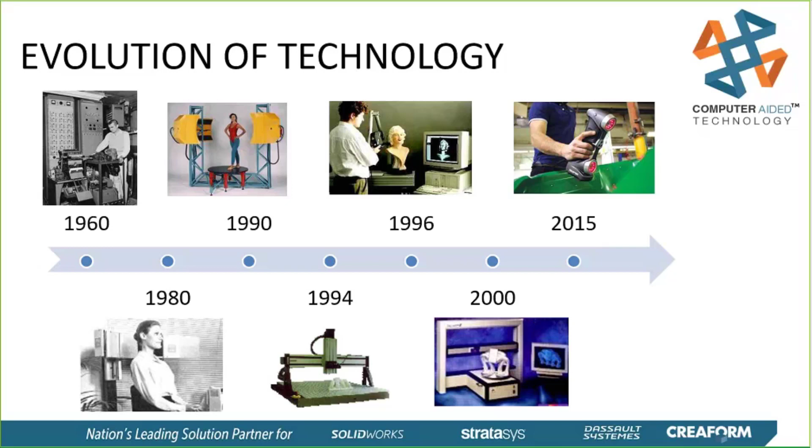There are many different types of 3D scanners that exist on the market today, and the best way to classify them would be to say contact or non-contact scanners. Although when it comes to non-contact scanners, we can break it down further into two separate categories: passive and active. For contact 3D scanners, you may have seen some on the market currently in the form of a CMM.

Basically they explore the physical object via a probing tip and must be in contact with an object surface in order to collect a 3D point. In order to use this device for inspection, multiple points are needed to create a single measurement. These are considered to be very accurate systems, but the workflow is a little bit more in depth.

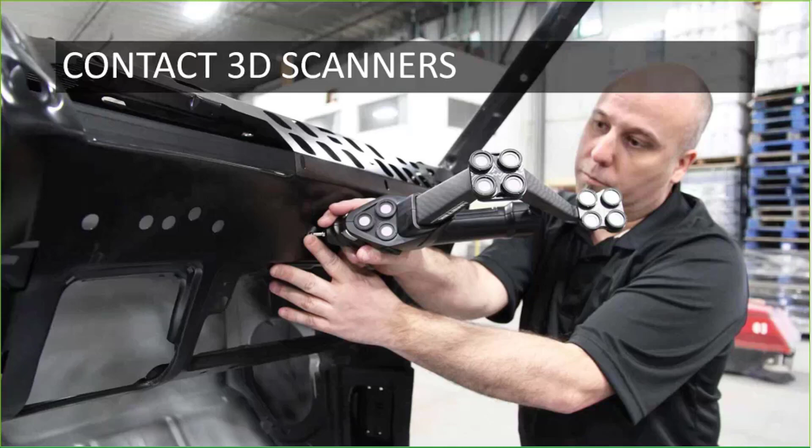Moving on to non-contact passive 3D scanners - these types of scanners don't emit any kind of light source. They rely on detecting reflected ambient light. Most of these typical scanners are usually in the visible light range, but there are a few that detect infrared. In most cases, passive methods are generally inexpensive because they don't require too much equipment besides a digital camera and some sort of advanced software. These are considered to be on the less accurate side, and you can find these pretty readily available in the consumer market.

Now, non-contact active scanning. In order to probe an object or an environment, active scanning emits some sort of light source, whether it be X-ray, ultrasound, laser, or white light, and detects the reflection and frequency of the emitted light on the object, providing it back to a specific optical system. It provides more clean and accurate data because it can control the signal, and these are great for metrology applications. They're considered metrology grade, and they're the ones most commonly found when doing inspection applications.

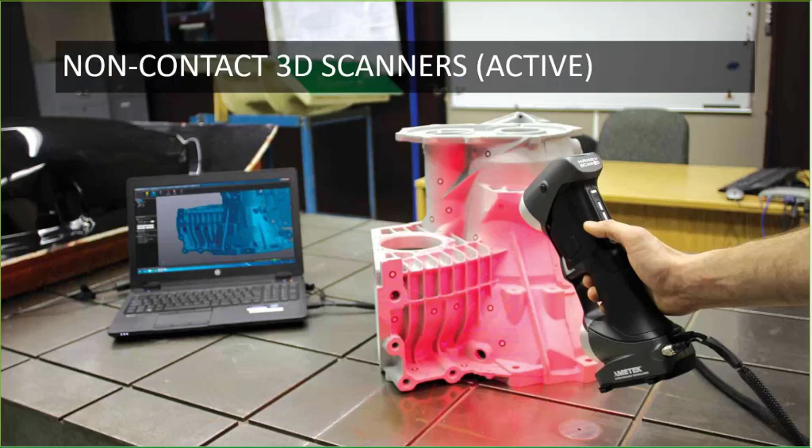Now, knowing a little bit about 3D scanning that currently exists on the market, not every scanner fits every application. This tends to be a gray area for most. So I find it kind of easy to break it down into 4 specific categories.

So the first category is accuracy. And when you speak to the volume of accuracy, you have to ask yourself: what is the tolerance requirement of my part?

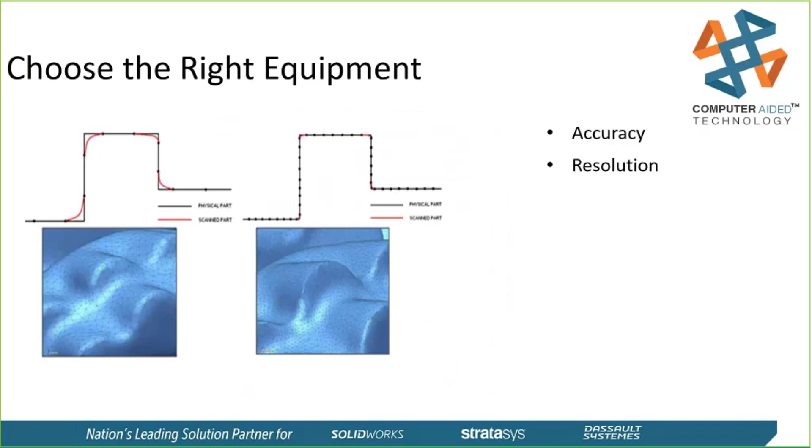The second thing we would look into is resolution. What is the smallest detail on my part? Do I have something that fits in the palm of my hand, or is it a large casting with very large features?

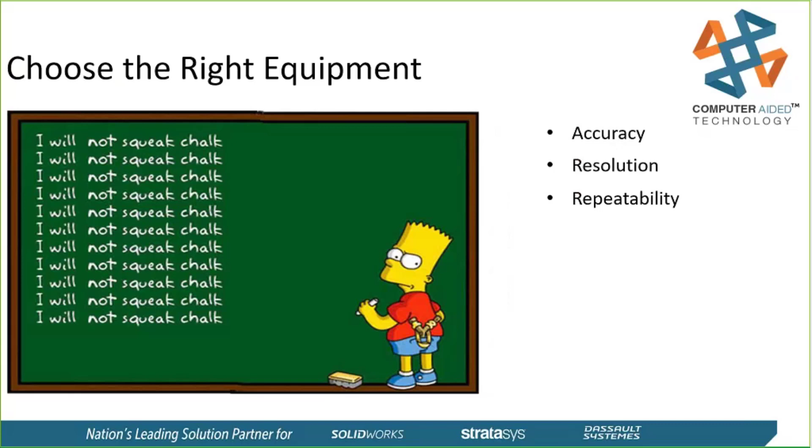Repeatability - so how many users will be inspecting with this equipment? Do you need to have operators up and running 3 shifts during a 24-hour period, and you need reliable results that are independent of the user? Or are you okay with training one specific person on this specific scanner to acquire certain measurements?

One other application or aspect would be environment. Are you working inside a quality controlled lab, or an ISO certified lab where humidity, temperature, and pressure are controlled throughout the entire room? Or are you working on the production floor, or maybe even out on a plant floor or in a foundry? Your piece of equipment actually has to fit your needs, and that's why they make a variety of different scanners on the market.

Creaform is one specific company that we've seen on the market and that we actually represent their equipment. They provide a variety of solutions for 3D scanners and inspection, everything from handheld devices to portable scanners, to contact and non-contact, and even fully automated QC solutions. They've been developing 3D scanners for over 16 years, and their mission statement is to develop and manufacture cutting-edge technology that fits all industry applications and overall improves productivity.

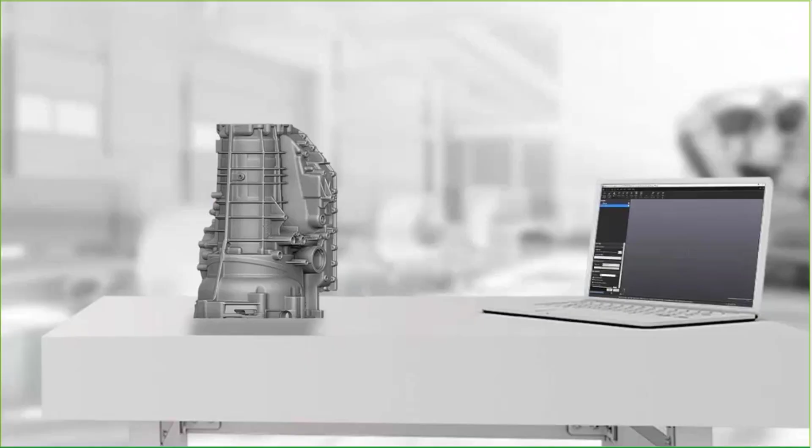The process of 3D scanning actually starts with applying positioning targets on our part. By doing so, it gives the part its own alignment, setting that 0,0,0 point aligned to our part. Next, after we push the trigger, the scanner itself sees these targets and identifies that alignment. This prevents any measurement drift from non-ideal environments, vibrations, or issues caused by the operator. If the part was moved by accident or bumped, the scanner would be able to recognize that the part has been moved because it has its own local alignment.

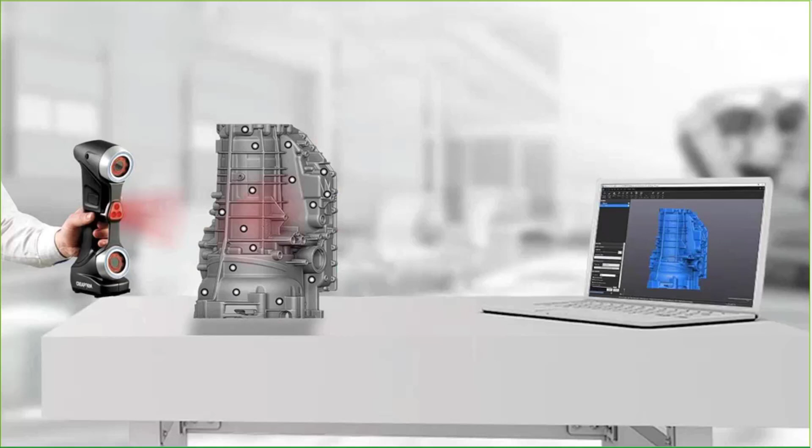Then the laser crosshairs scan the surface of the part, and finally it digitizes the surface in real time on screen. Now let's take a closer look at what is actually going on. The scanner is working in conjunction with the software to create 3D points in a virtual environment that represent the physical surface of the part.

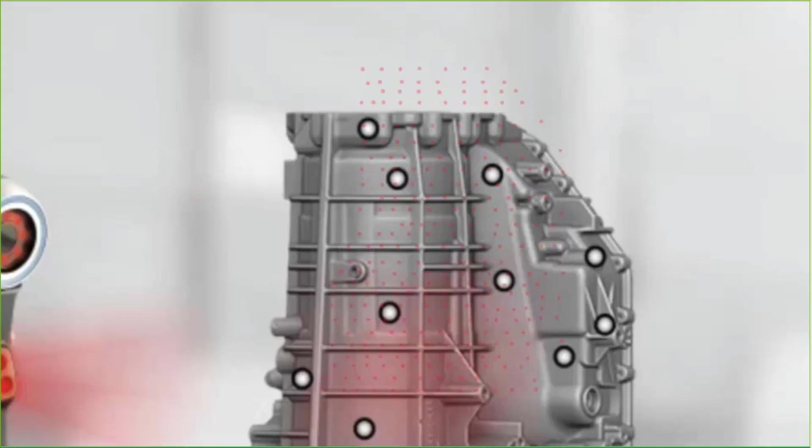Now, when we talk about accuracy, that one category we discussed earlier, we're actually trying to hit a point on the nominal surface. The perfect surface of the part, if we look at the CAD model or design it in SolidWorks or look at a drawing, is called the nominal, which I already mentioned. We represent that with a straight line, and ideally that's how we set up those measurements, from nominal surface to nominal surface. So when scanning or acquiring measurements, we want a point to be exactly on that line.

But not every system that exists in this world is perfect. In fact, there aren't any systems that can perfectly match every single time a point on a nominal surface. So when we talk about accuracy of equipment, we discuss a plus or minus tolerance of the actual equipment we call accuracy, and it builds an accuracy window around our nominal surface. When it acquires those points, they will float around that nominal surface in a window, creating a tolerance of your part.

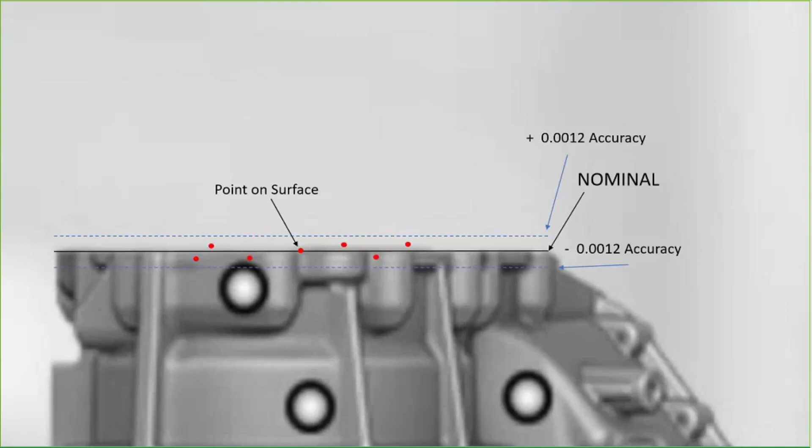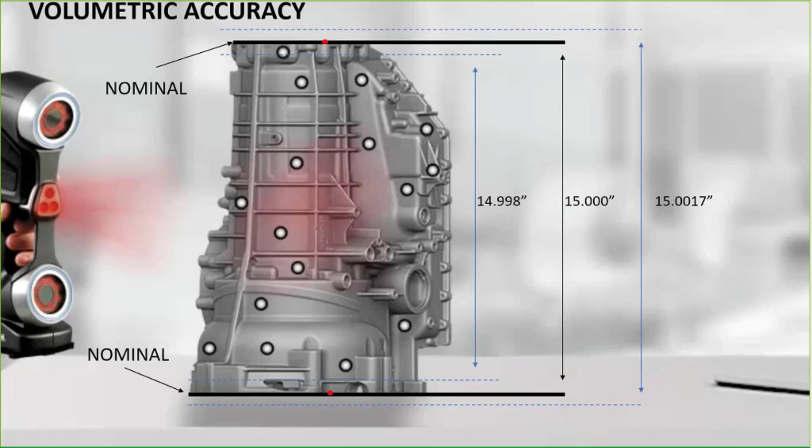Now, that's just accuracy to a point on a surface. When we apply this theory to real-world applications, we need to consider that we're not just interested in a point on the surface of a part, we're actually after measurements from one point to another, or one nominal to the next. As you can see, the overall perfect length, if we look at our drawing, is 15 inches exact, and ideally that's what we should measure with our scanner, right? But because of the 3D error due to the equipment and the environment, we could have a range of measurements from point to point, falling within that volumetric accuracy. So when you consider 3D scanning an object for metrology, you really have to take into account the volumetric accuracy of your part.

Now let's talk about different common outputs of 3D scanners, output file types. Two of the more common output file types for scanners are point clouds and STLs, which is short for stereolithography. You might be familiar with this file type from 3D printing. It's a file type that has been around for quite a while.

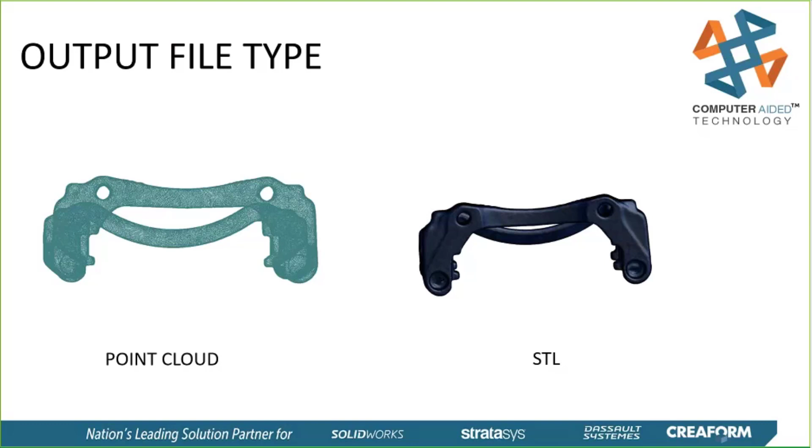A point cloud is composed of thousands of Cartesian points in a dense volume that outlines the shape of our object. An STL is composed of many connected small triangles with a normal vector that forms the outer surface of an object. The pro of having an STL versus a point cloud is it makes it easier to do mathematical extrapolations for your measurements. The con of the STL, though, is the file size is a lot larger than a point cloud.

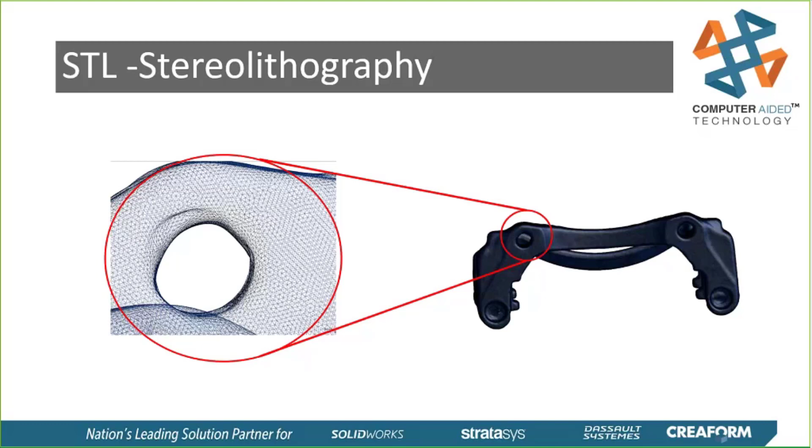Now let's talk a little bit about the inspection workflow and what it would look like with a 3D scanner. There are many different types of inspection workflows with a 3D scanner, and there are actually many different types of inspection software on the market. Again, I'm going to use Creaform as an example.

They developed a software called VxInspect. Inside that software, they have simplified the process down to 6 main workflows that cover pretty much 90% of what all industries need. So we can create an inspection workflow with just numerical data, similar to what a lot of people do with CMMs, where we input a nominal measurement and then go ahead and verify it on our part.

Or we can compose an inspection report with a scan compared to another scan. In a sense, we take a scan of a gold standard and line it up with our new part, and see if they fall in and out of each other or how far out they deviate in our manufacturing process.

Others like to verify things in 2D. So we have the ability to create cross-sections inside VxInspect on our digital part, and look at measurements or entities in 2D, such as a circle. We can verify a diameter in 2D of a circle.

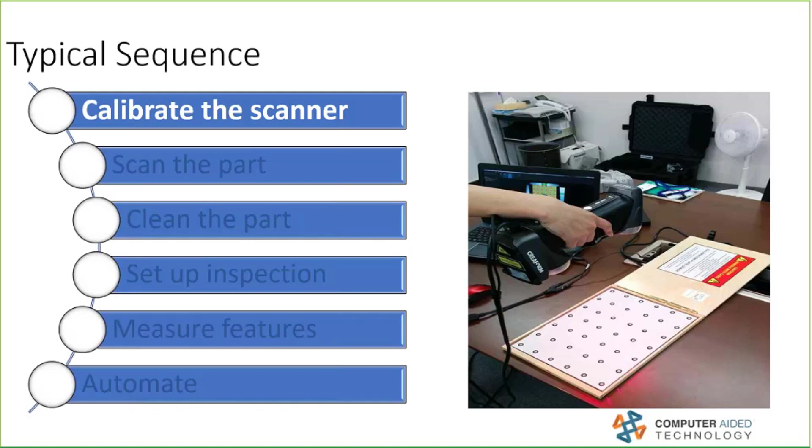Next, very simple, all we do is scan our part. After we've placed our positioning targets on it, we go ahead and hit the Go button, and we start acquiring the surface of our part.

Once we have our digitized model on our computer, we have to go in and take a quick editing step here and delete out any unwanted data, such as a table or a hand or anything else that might be in the area you acquired. Because really, you don't need all that extra data or extra processing time—we want to just isolate our part and inspect that only.

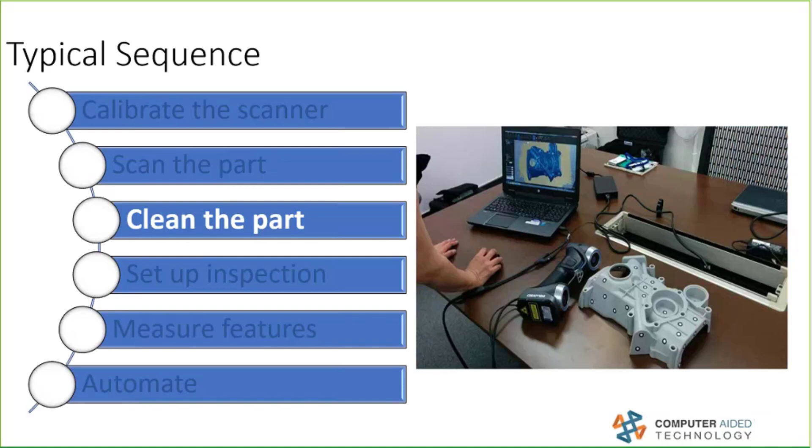Next, we import our CAD model and use that as a nominal measurement. You can think of this like an interactive drawing of your part—you already have all your nominal measurements built into your CAD. All you need to do is select the features you want to compare this to and tell the software what tolerance to compare it to.

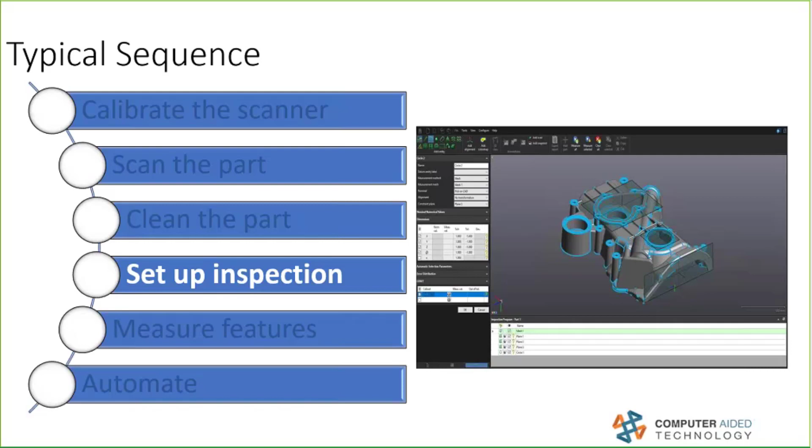In this step, we select the features you wish to inspect and have the option to set the tolerance, the GD&T, or color map, which is a great way of verifying a visual effect of whether it's in or out of tolerance.

Finally, I like to call this automation step a bonus step. After you've created your first inspection report with all your critical features and tolerances, you can save that template and apply it to another scan. This way, once you've completed the scan step for the next part, the software will automatically fill in the rest and produce a final report.

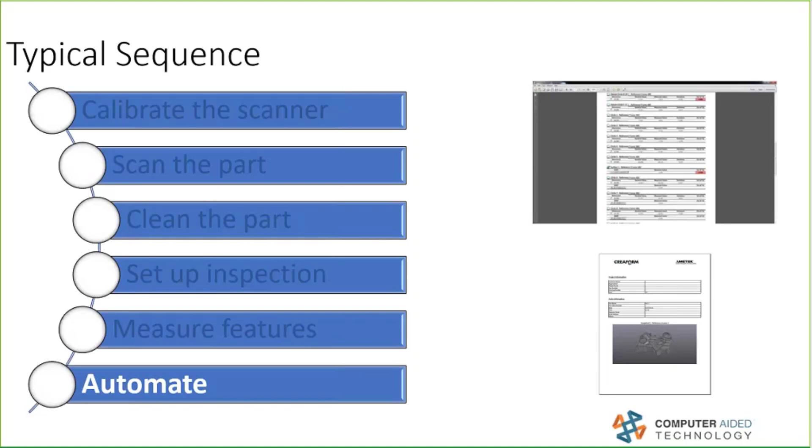This is a very powerful tool when you have to inspect batch parts, allowing the user to go from weeks turnaround to mere hours. So now that we've covered a little bit about the workflow with our CAD model and inspection equipment, let's cover a few applications where we've seen 3D scanners used in quality control and inspection.

So when it comes to part investigation, not all inspection is performed in the QC lab. In the tool and die industry is where that theoretical meets the practical, or that rubber meets the road. When we design tools from our ideal CAD model, certain issues occur that are unforeseeable, such as shrinkage, springback, warpage, or other unexplainable physical phenomena.

The real question at that point is, how do we adjust and design to fix these issues? This is where 3D scanning becomes vital. Being able to measure the warpage of a part from the tooling and adjust the draft, the thickness, or even our temperatures of our flow to fix the issue with the scanner becomes an invaluable tool.

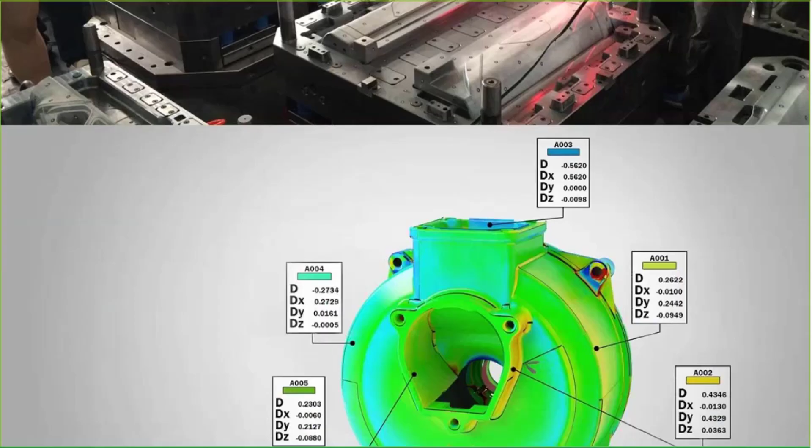So we talked a little bit about quality control. Whether it be pre-production, in production, or post-production, 3D scanning has shown its biggest benefits in the quality control world. Doing your first article inspection reports, we have the ability to develop a full PPAP inspection report in the short time it would take to scan the part, as we discussed in our automation step. And again, we accomplish that by comparing it to our CAD for our nominal.

This picture actually depicts a color map, or a topographical color map, that represents deviating in or out. So if it's green, it's within our tolerance zone. If it's blue, it's cutting into our part. Or if it's red, we consider that plus material on our part, or out of tolerance.

Other applications on the production line is where every second counts. Being able to save downtime and fix issues effectively translates to dollars. Some of the more common issues 3D scanning excels at solving are adjusting jigs and fixtures.

To prevent some production drift, we could also do virtual assembly of two parts from separate lines. So if you have two parts of a door being made on two separate lines, and you want to make sure that they're going to line up down the line, down at the end of the line when they're welded together, we could actually scan them during the building process and snap them together virtually. That way, if we have to stop it mid-line, we only lose a few minutes or a few parts versus everything backed up down the line.

Now let's take a look at a specific customer application. So you may have heard of a company called Koenigsegg. It's a high advanced sports car manufacturer. The Koenigsegg story is one of humble beginnings. They dedicated their vision and unyielding commitment to automotive perfection. It's a Swedish supercar manufacturer that was founded in 1994 by Christian von Koenigsegg.

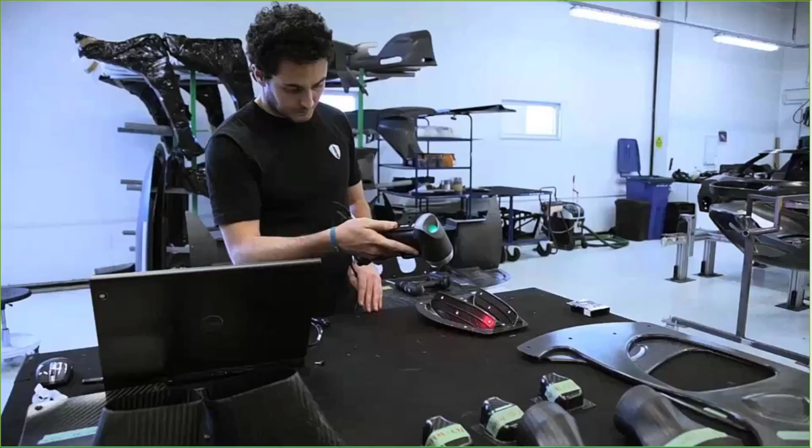The Creaform systems, the HandyScan and the HandyPROBE, has really enabled us to get quick feedback on the quality of the production line between the cars, and also for us to set up our jigs and fixtures and procedures much quicker and shorten the discussion time between what's right or wrong or what affects one another. That has really made a big impact for our efficiency, our tolerances, and in the end, quality and customer satisfaction.

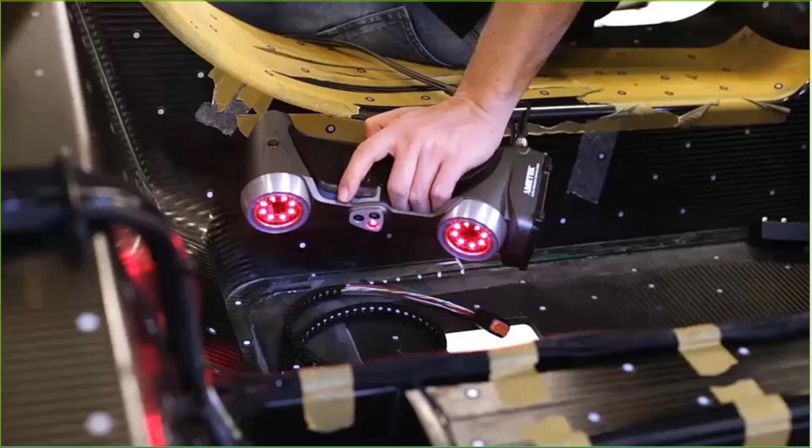For our coming cars, we're already planning to implement the HandyScan, especially in the design process, where we start with hand modeling roughly and going back into the computer and refining it, taking it out via CNC machining, and then modifying it by hand and going backwards and forwards like that. That's already in the pipeline, but also more and more in the production process, quality check the product and check that everything is aligned even before we might find it.

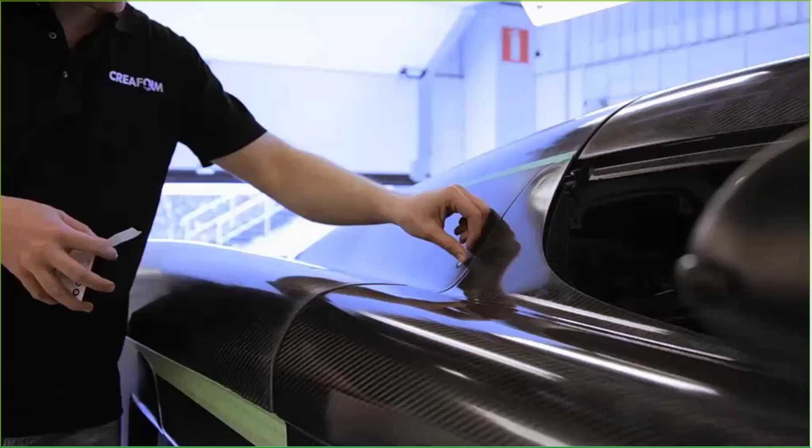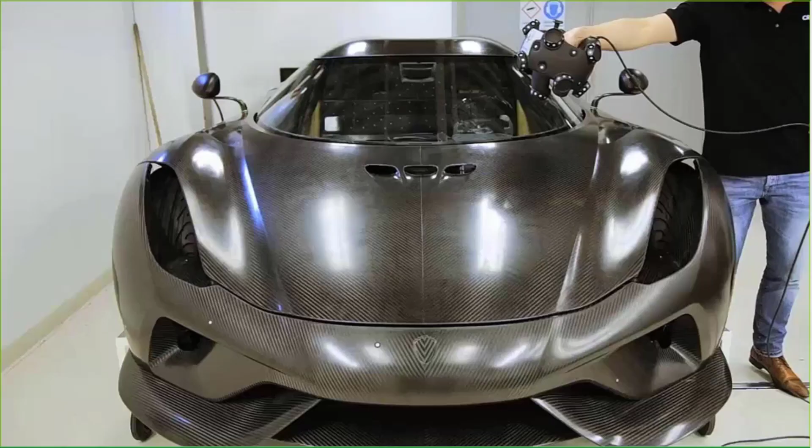It's easy to use. It's very powerful for engineers because of the accuracy and the speed of use. I can even see similarities between our product and what we are doing and what Creaform is offering to its customers. We've seen great progress with the Creaform systems over the years.

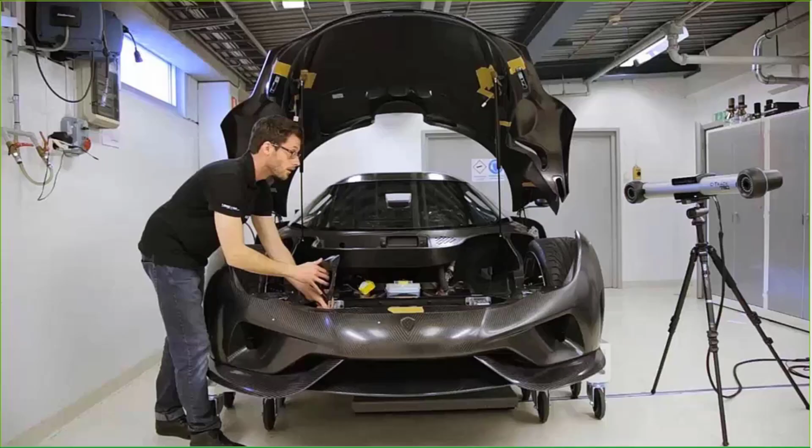We've been using them, and we can also see we're using carbon fiber to make the product lighter and more user-friendly and have better performance, basically. And that's exactly the same philosophy we're using in our cars, to apply the right material, the most applicable material for the right task. So I think it's a product that goes well hand in hand with what we do.

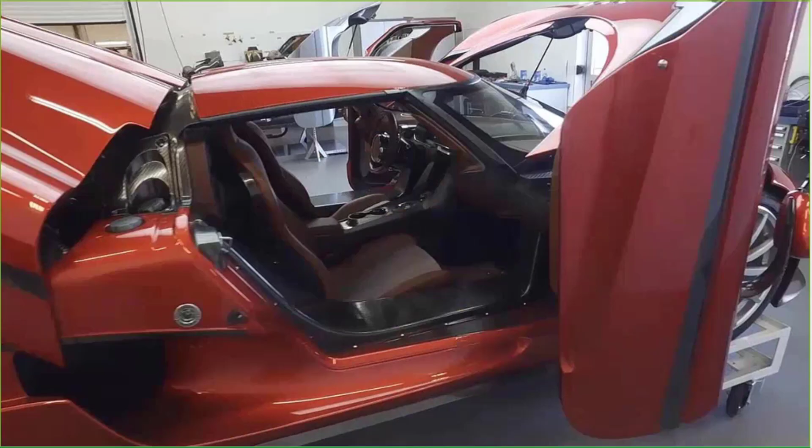We try to push the boundaries at all times in our development and the design of our cars. As we say, perfection is a moving target. It's a very difficult challenge to stay on top and stay ahead of the competition. And when we choose partners like Creaform, we're looking for the same aspirations from that company. We definitely feel that Creaform, they're leading the way in metrology, like we're leading the way in technology.

Okay, so that is an example of how Koenigsegg has improved their overall process in their company utilizing 3D scanners.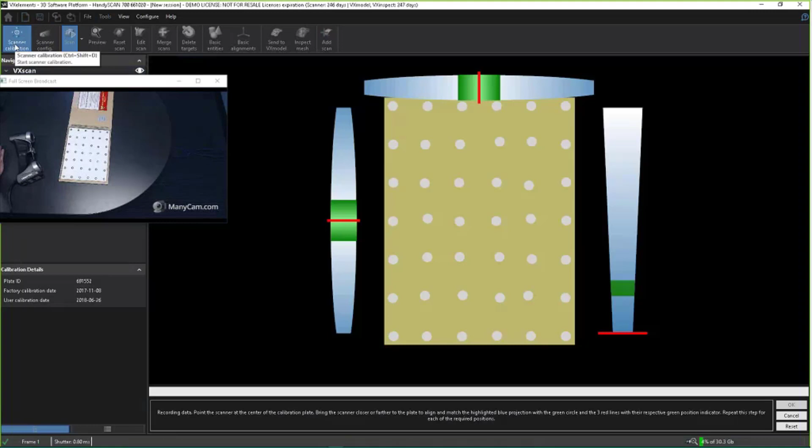Now, the scanner calibration is pretty easy. It's just a matter of pointing it at the artifact, going through each step, and you can see the green bars on the side, top, left and right side and top, indicate my left, right, front tilt of the actual scanner relative to the plate. All I have to do is line up the center circle, match the tilt, and you can see it actually fly through the status bar on the bottom.

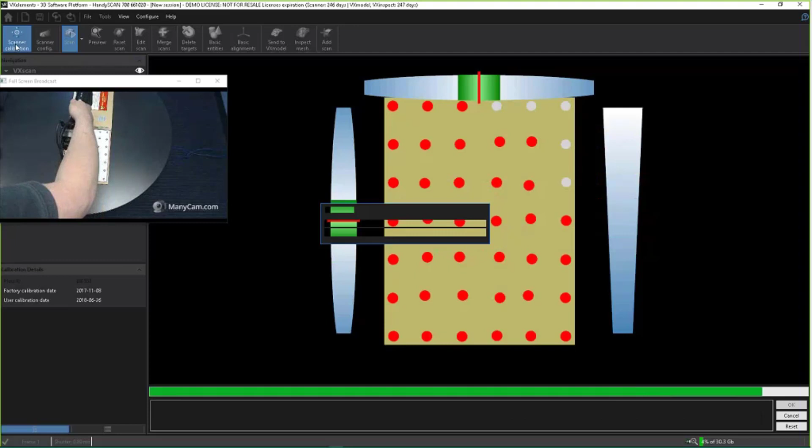And here we'll do a little bit of rotating. And we'll make sure we meet all the requirements. Last one, I believe. There we go. And just like that, a very quick process when it comes to calibrating.

The scanner's calibration is optimal. The software actually compares it to its original factory specs. And you can export out this calibration journal if you need to meet some ASME or ISO standards. So if you are required to do this for metrology applications, it'll show you the operator, the time of day, whether it passed or failed as well.

So we'll go ahead and put our artifact away, and we'll get to scanning our actual parts.

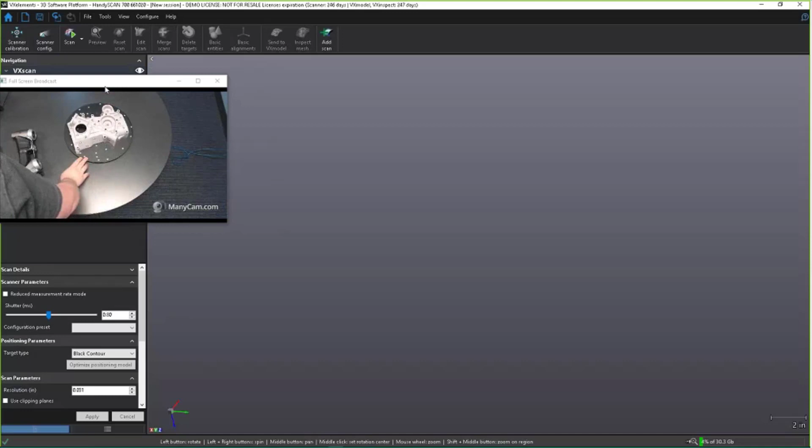So today with me, I have this plastic injection molded part. And I've placed it on this turning table specifically for this webinar. It makes it a little bit easier for me to operate in front of the camera. But it's very simple. All we have to do is press our spacebar or activate our scanner.

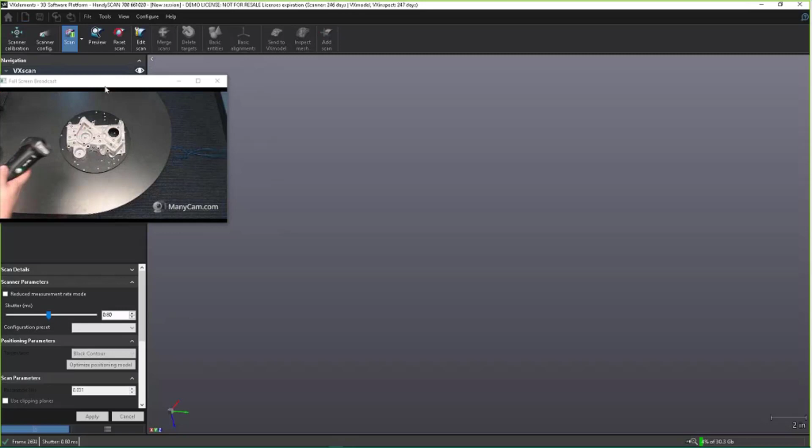Our positioning targets I've placed on the part itself and on the turntable for a little bit of extra help. I'm going to point my scanner at the part, and we're going to go ahead and pull that trigger. Move this up a little bit.

So you'll notice there's a distance bar. We see it as color. Blue is too far away from our part. Red is too close. Kind of like painting - what we see is what we get.

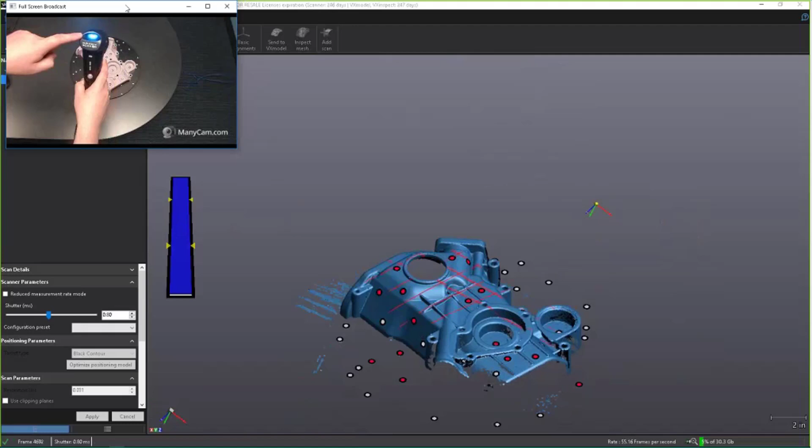And on the scanner itself, we can actually see that color bar right back here on the back of the actual scanner head, so the operator has a visualization tool when they're scanning. I also have a couple of menu options here. When I'm actually scanning, I can go ahead and zoom in on screen to make sure I'm capturing all the features I want, or focus on a specific area.

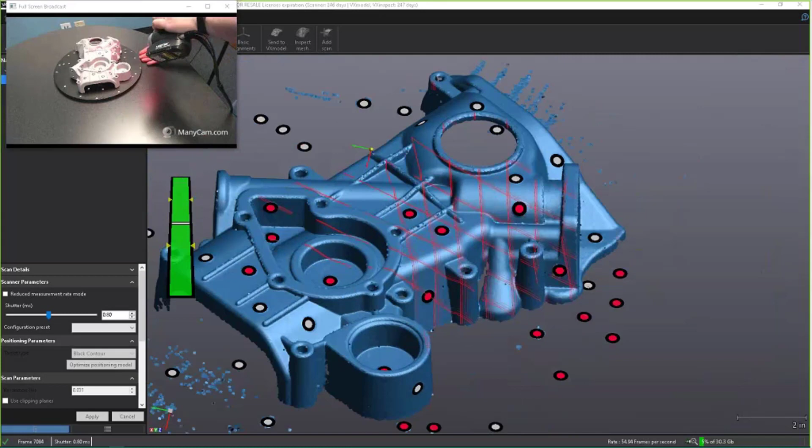Go ahead and make sure we get everything around the sides. And you can see how quickly it's actually building our parts.

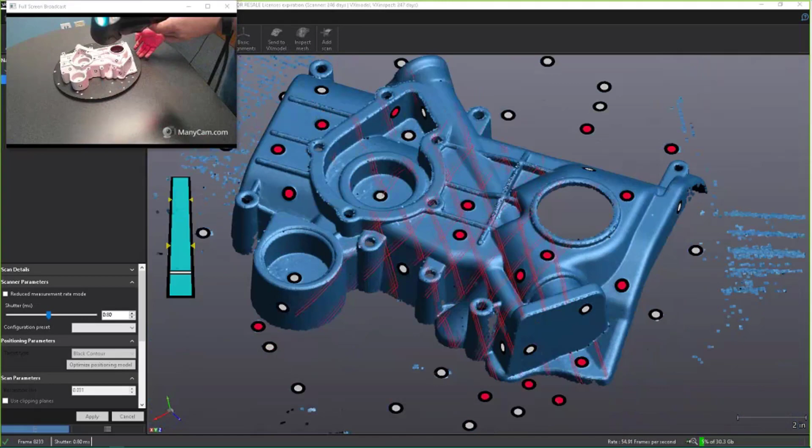When it comes to accuracy, this particular scanner picks up the positioning points or the 3D points of the surface within microseconds, and it optimizes it. So if I was to hold the scanner on one specific area, it's not going to constantly collect that area, so I don't end up with large files.

All right, we'll go ahead and pause the scanner itself. We'll take a look at our image, rotate it, see if there's anything we missed. It looks like I missed some of this edge and a little bit in this area. We'll rotate it on the screen, go back over here, and make sure we pick that up. Very user-friendly, very interactive workflow.

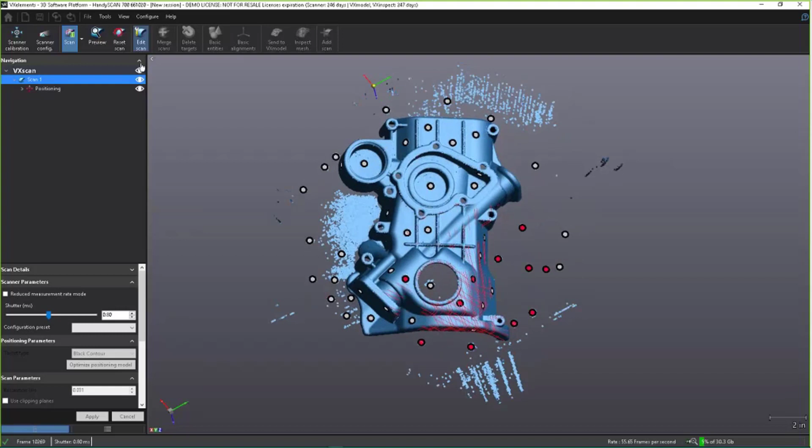You can see on screen I have some of the table, maybe some of my arm in the corner over here, and that's unwanted data. Now I can inspect with this and continue forward if I want to, and it won't really affect my measurements, but I'd prefer to have my file size smaller. So I'm going to quickly jump into my edit option, and I'm going to flip the selection so everything that is not my part, we'll go ahead and delete. That way the only thing left is my part.

We'll now jump out of that edit option, and we'll let the software complete the scan processing.

So we'll go hide those positioning targets. Again, I needed to place them on the part in order to give it its own alignment while I was moving it. I wouldn't have been able to rotate it on the table if I didn't have those positioning targets. But because I put the positioning targets on there, I didn't have to worry about inaccurate measurements caused by moving or vibration. And the software knows the size of the targets, so it actually sets it up as a different layer.

Now that we have our scan, there's a couple spots that are missing. I can either go back in and scan those up — I missed a little bit part of this cone — or if I know I have all my critical features, I can go ahead and move forward. And for the sake of this, we're going to go ahead and move forward.

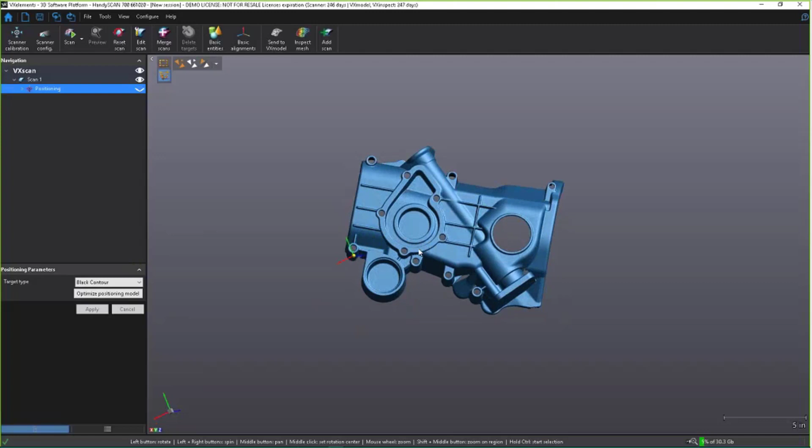So the next thing, we're going to go ahead and import our CAD model. And again, we treat our CAD model as our nominal measurements. We'll give it a second to upload that.

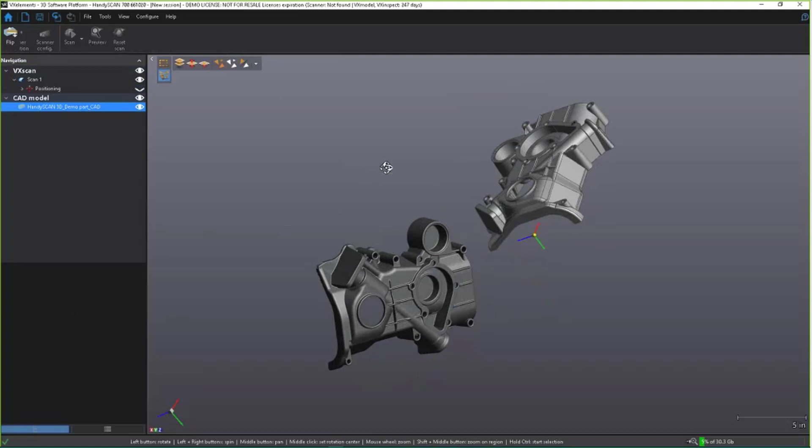So here we have our CAD model, and we have our scan inside our software. We'll go ahead and jump into our inspection module.

Now, the first step I have it prompt me with is actually an alignment option, and this helps with saving my computer some calculating time. I'm going to pick 3 points on both my CAD model and on my scan that are pretty similar — it doesn't have to be exact. You'll notice over on the left-hand square that it's kind of aligned my scan and my CAD, but not perfectly. Once I hit accept, it'll go through and do a more refined alignment. But by locking those 3 points, it saved my computer a lot of calculating time of trying to find two objects in three-dimensional space.

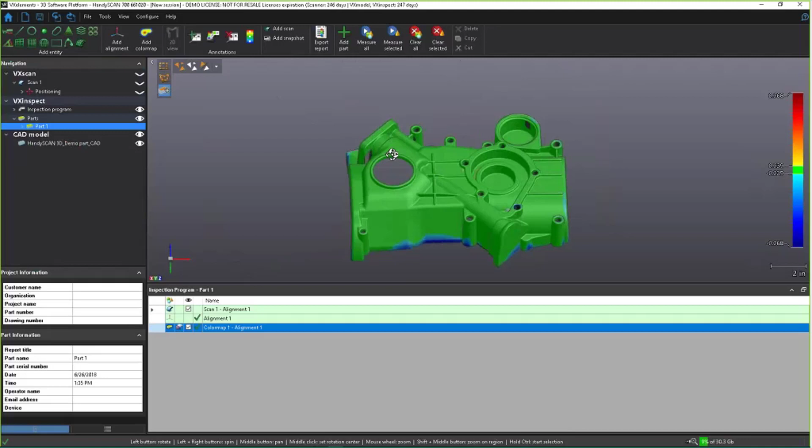And here we are with our color map right off the bat. We'll actually tighten up this tolerance a little bit more. We'll set it to 0.03.

So right off the bat, this is a best fit alignment. I can see that there is some parts deviating off of a best fit. Plus or minus 30 thou is the green. Red is actually extruding out from our part. Blue is cutting into our part. So with a plastic injection molded part, just off of a best fit alignment, this tells me a couple things: one, the ejector pins were on the back side somewhere in the center, and two, it probably ended up cooling while it was still in a soft state, deforming the center and sagging on the outsides.

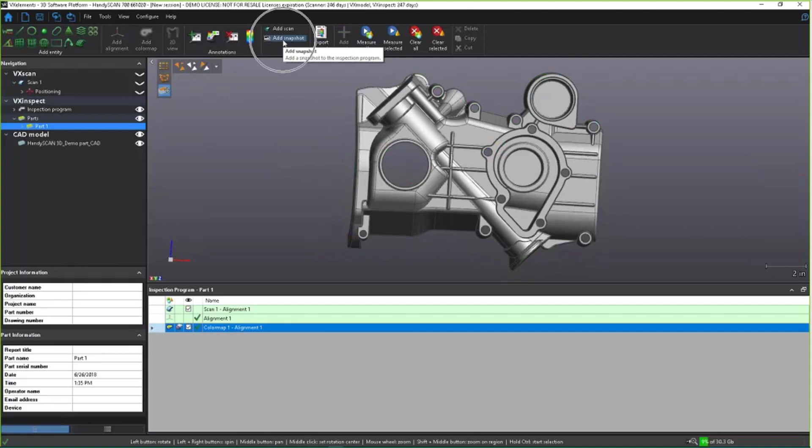So if I want to tell my manufacturers this is what I found initially, we can go ahead and add a snapshot right off the bat here up at the top to show up in our report with that color map. And if we want, we can add a couple of items onto that snapshot as well. Go back into snapshot mode here, and add a couple of bullet points of where it's actually deviating, with some numerical value, because everybody loves numerical value.

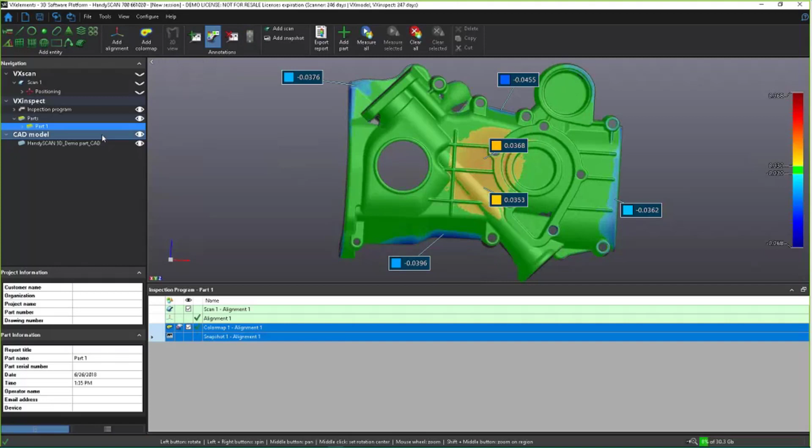Now from here, setting up the inspection is a matter of going through your critical features. So I'm actually going to change my alignment. My drawing specifies that I have a datum alignment, meaning this is going to be my datum A, this top feature. And notice how I'm picking on the CAD itself graphically.

I select this top surface. The software recognizes that it is a flat surface, and I can go into my selection items and say let's label this datum A, and compare this to our scan. Now it's already pulled up a flatness callout. We can go in here and adjust this as well, and that will now show up in my report with the flatness callout of that top surface.

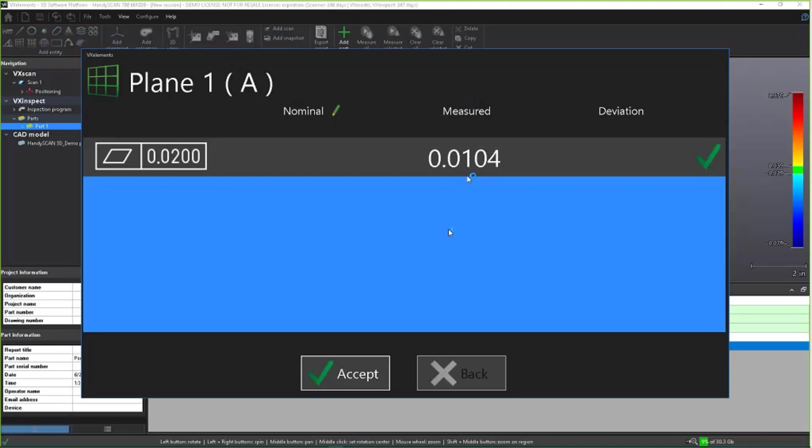We'll go ahead and select our datum B for alignment, and we'll select the center axis of this column. And what I'm going to do here is select all my datums and then realign this scan to those datums so my measurements from my drawings will fit those datums.

Now we've got our datums. I'm going to go ahead and add an alignment, and we'll say datum A is my primary, datum B is my secondary, and datum C is my tertiary. And that is per my drawing.

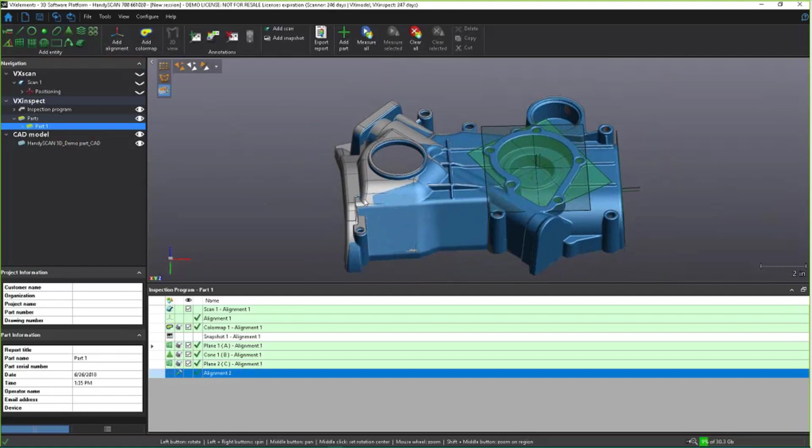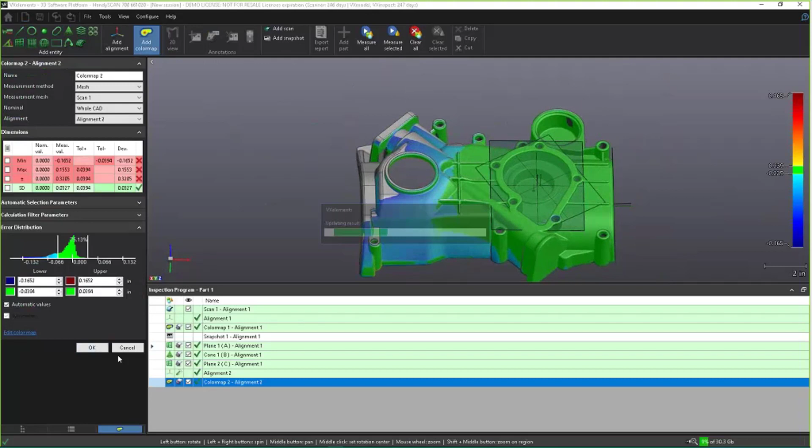Now, if we do a color map, maybe my datums are made from manufacturing. These are things that we measured when we built the tool. But when I add my color map, you can see we got a significant difference. Maybe this will translate back to the manufacturers, the guys designing the tooling, and they'll see that maybe there was something that wasn't cut quite planar off of this. We'll go ahead and add that color map in and take another snapshot.

We'll add our numerical data in here, into our report, and we'll move forward and start inspecting some critical features.

So the first thing I'm going to go ahead and create is a plane on this back side. Then we'll create a plane on the front side. Oops, let me delete that. I selected probe, I have my probe turned on. Go back in, say mesh, select this back face.

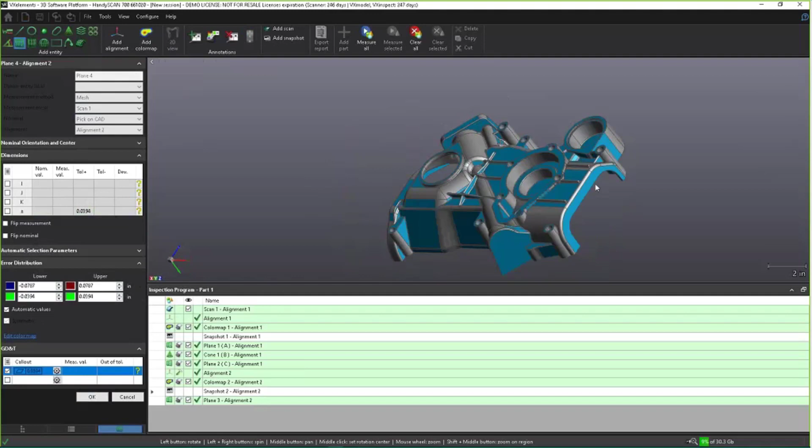It automatically identifies it on the scan by picking on my CAD as my nominals. I don't have to worry about user error, measuring the wrong point, measuring from the wrong point, or measuring the wrong feature entirely. So we'll actually measure between those planes to get an overall distance.

And we only want the X reported in our report. So over here on the left, you'll see my dimensions. This is where we'll actually set up our tolerance zones. We have a plus and minus tolerance. I can go ahead here over on the left and say we'll change this to 0.0, 5 thou, minus 5 thou.

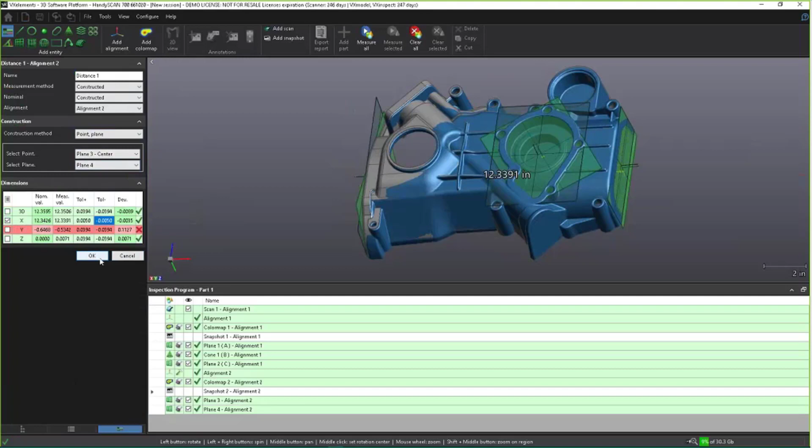And we'll have that show up on our report, the overall measurement. So what's going to show up on my report is my nominal, which is my CAD value. I didn't have to type that in, that was pulled off the CAD. The measured value, which was of this specific part, and what's the deviation. The tolerance will also show up on the report, it just doesn't show up in this quick view list. As we can see, it's got a check mark, which means it's within tolerance.

We'll go ahead and grab a few more things. We'll grab this cone over in the corner. And we'll have, let's just go with X, Y, Z information. Let's just put all the information in our report.

We'll even go further. Down at the bottom here, we have GD and T information. So we'll say, what is the true position within, I don't know, 30 thou to datum A, B, and we'll even say C. And we'll put that on our report, which is going to fall out of tolerance.

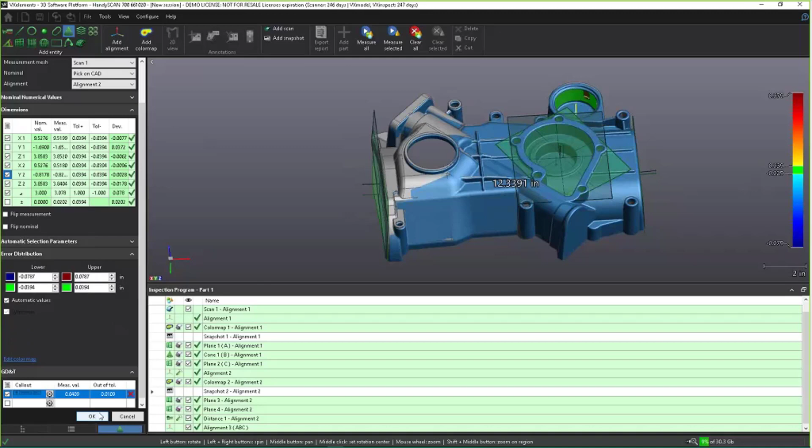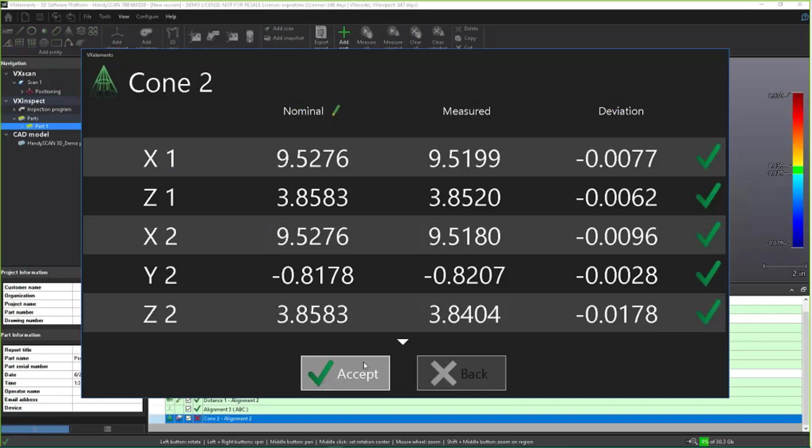So we've got all those points, X1, Z1, X2, Y2, Z2, our GD and T, all that's going to show up in our report. We can even have a call out with a snapshot if we want of these specific items to show up in our report as well. So we'll go ahead and take a snapshot of that so our person who's reading the report has a better workflow or idea of what we're actually pointing at if they don't have the drawing in front of them.

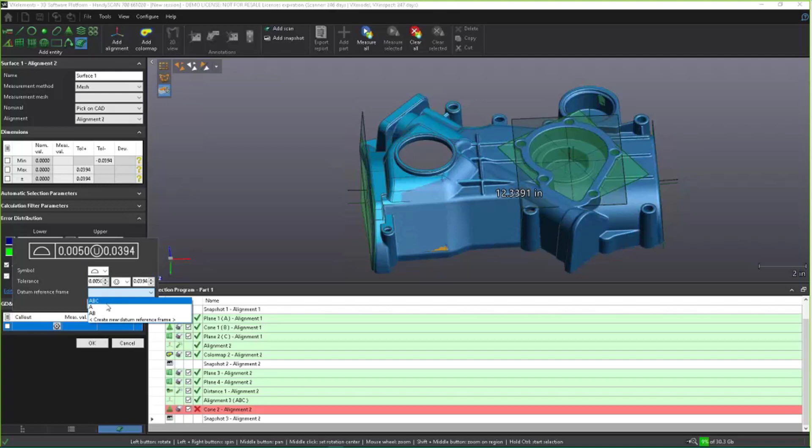So we'll go a little bit further and we'll grab a surface. We'll say, what is this surface deviation from our actual CAD model? And we'll add a profile tolerance to A and B. All right, and we can see graphically the color map doesn't match. So with my 5 thou tolerance, unilaterally, we're a little bit out.

Next thing we can do is we can add a little bit of 2D dimensions. We'll use, since these are drafted cones here in the center, we'll throw a plane here, or we'll use plane datum A, and we'll drop it down to a certain distance. Actually, you know what? I apologize. We'll create a new datum to get this cone, this inner cone. So I've just selected that top plane graphically, and I'll say, grab a 2-dimensional cross-section of that.

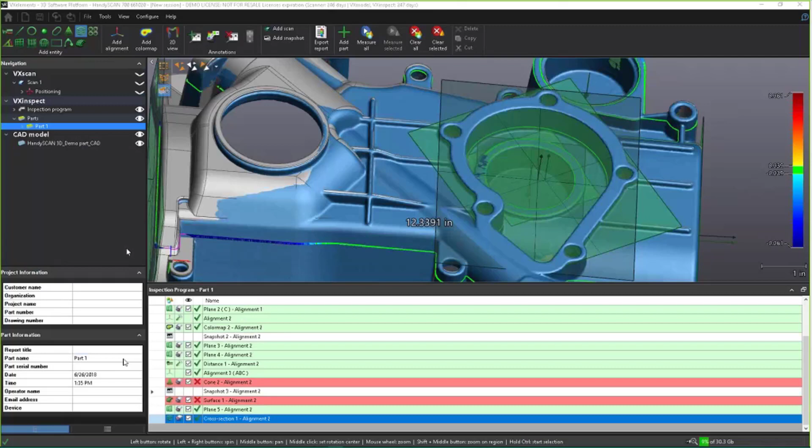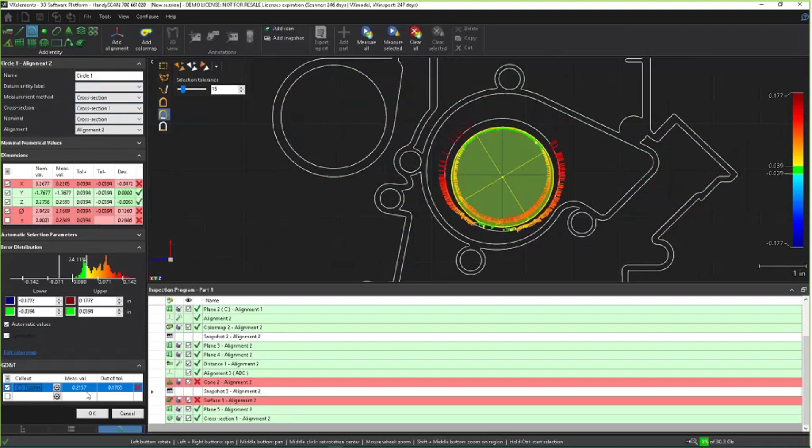Now when we look at it in 2D, we've got something similar to what we'd see on our drawings. And now I have a whole new world of inspecting in 2D. I can say, grab this, compare this inner circle, or this outer circle, to the actual datum, or the actual physical model. We'll do the inner circle. And we can set our overall color tolerance map if we want to, depending on our constriction, what's acceptable and what's not acceptable, and we'll have that show up in our report as well.

So we can do 2D GD&T if we need to. We can do 2D verification if we need to as well. And we can add that snapshot into a report if we wanted to as well.

And I'll go ahead and do that. Let's say cross-section, circle, snapshot. All right, so we've got a few pieces of information.

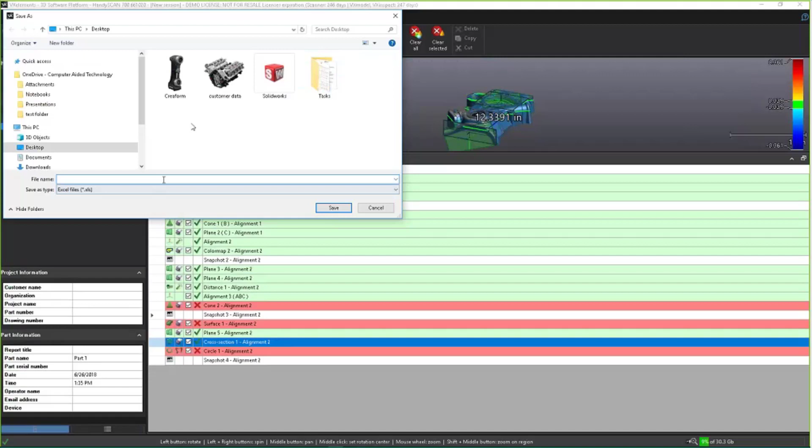This is kind of the workflow you'll go through when using a 3D scanner. All these items I've created in my inspection program are my critical dimensions and features that I want to show up in my report. Additionally, it is a saved template. So we're going to export out this particular report and take a look at it, and then we're going to scan up another part and see how it compares to our report for that extra bonus automated step.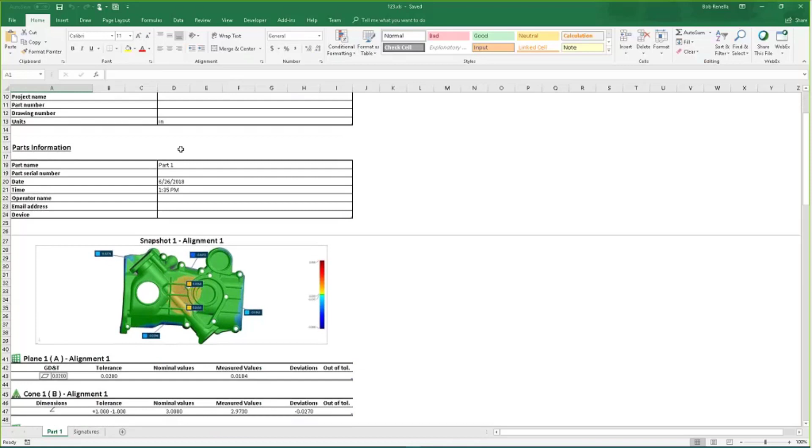So we'll give it a second to export. We can put our project, customer name if we want on top, time, operator's name. We've got a snapshot of our color map. We've got our datum A, B, and C, so we know what datums we've used.

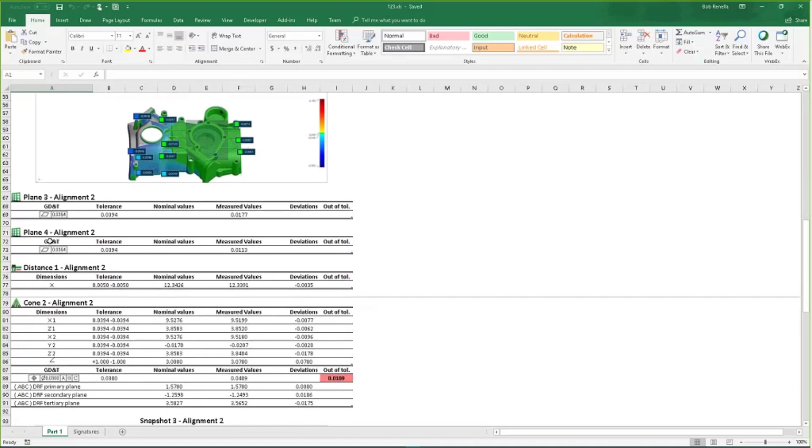We've got our GD&T flatness callout, our distance, remember that was a plus or minus 5 thou tolerance. There's our nominal, there's our measured, there's our deviation. This didn't bubble in red because it was within tolerance, but when I did my true position, which you can see the ballooned item here that it automatically put in with the tolerance, we can see it was out of tolerance and it ballooned it in red on our report.

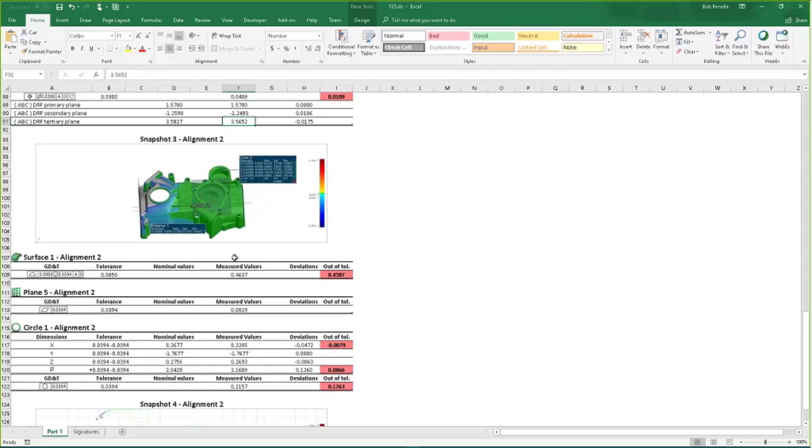So it'll automatically stand out to us that there's an issue, and it'll show me my primary, secondary, and tertiary deviation from nominal to measured values. All these calculations are inside the software. All I had to do was pick them graphically off the CAD model. Here's our 2D verification as well.

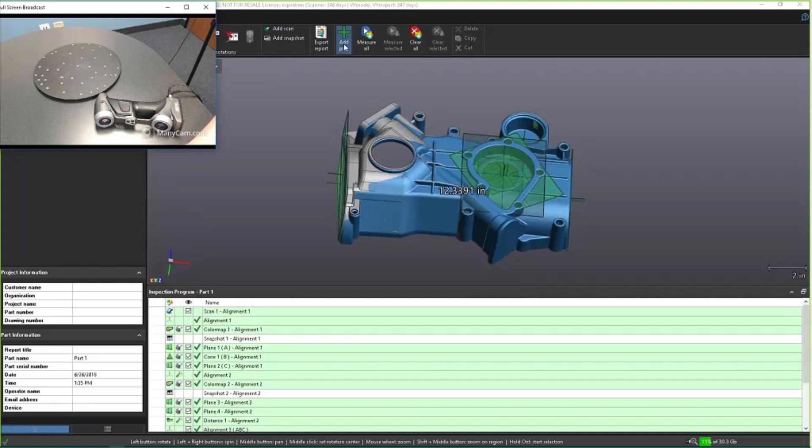We'll zoom in a little bit with our circle. All right, so what I'm going to do, we'll pop our webcam back up here. We'll use this program and inspect another part. So all I'm going to do is, once I've had my program created, hit Add Part. It's going to clear my entire inspection program, but it's going to save the initial one over here in my tree. Now I'm on Part 2.

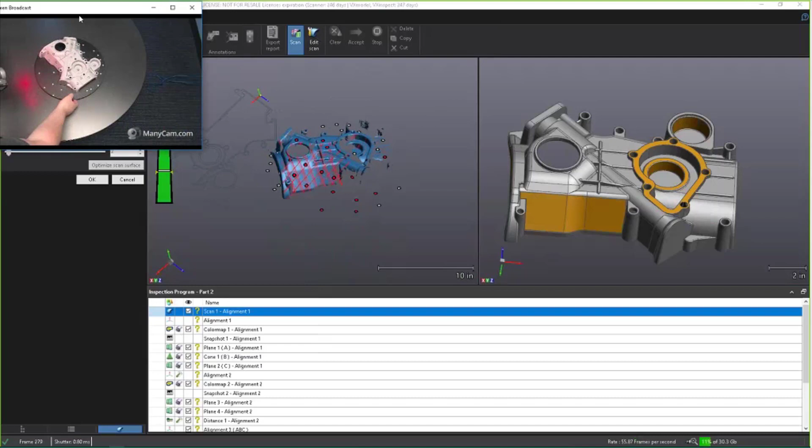Once I hit Measure All, I begin my process. We'll go ahead and put this part on here and begin our scan process again. Same as before, as long as we acquire the surfaces, what we see on our screen is what we get. I'm going to go ahead and zoom in here so we can see a little bit better what we're capturing.

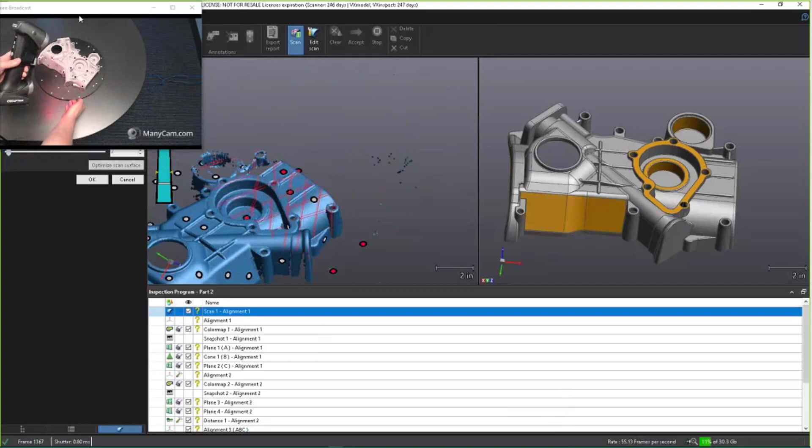Make sure I get all these edges. I didn't get too many of the critical features for time's sake, so I'm just going to focus on gathering the items that I did acquire. You can see over on the right it has highlighted in orange. Another added bonus.

The one thing I didn't mention before, this particular scanner does have a single laser mode, so I can get into that little crack that I missed before. Kind of like a fine paintbrush.

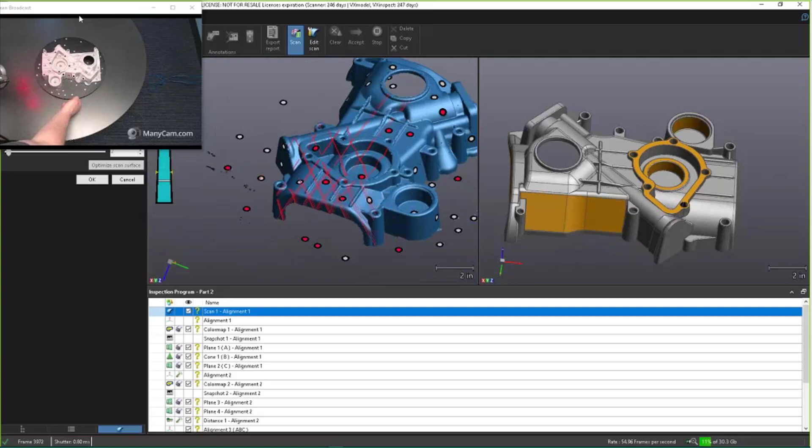Now, I didn't need to scan this entire part if I only have those few critical features, I could have just focused on those. But because I scanned this entire part, if I ever want to go back and gather more critical features off this one scan, I have it saved. So I don't have to go back to my part and actually scan it. I've got it saved in a digital file, which helps alleviate some of the bottlenecks of inspecting, running back to the part, gathering information, running back to the lab, and figuring it out in a report.

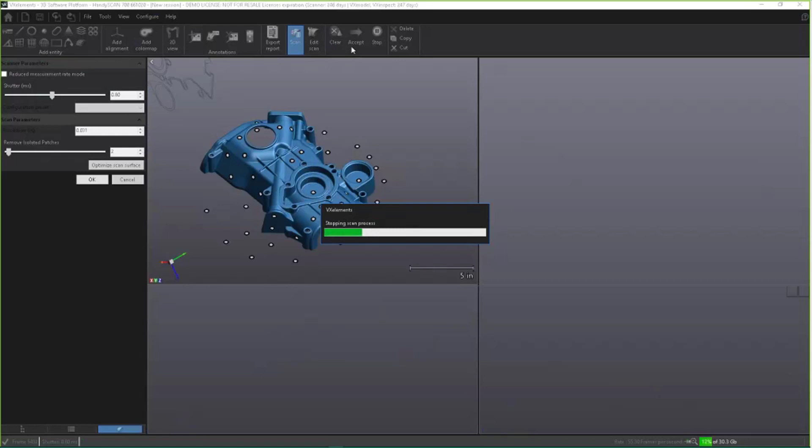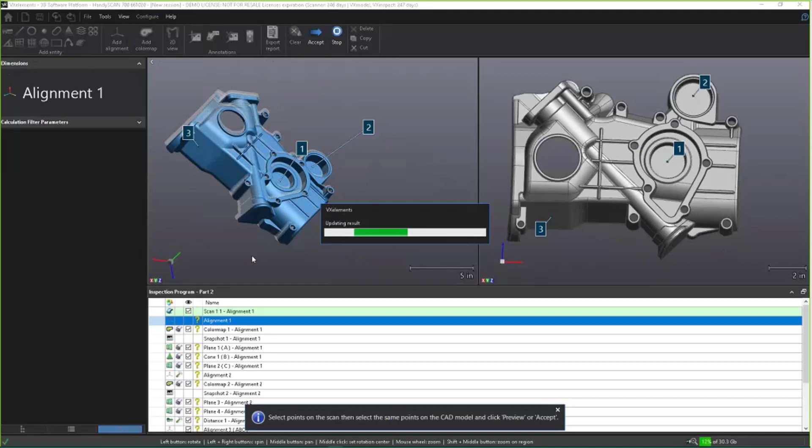Again, we'll get rid of some unwanted data that we don't want. We'll let it process. We'll pick our 3 points. We'll accept it, and notice the inspection program has question marks on it. It's now going through and updating each one of those critical features with the new scan, and just like that, I'm completed with my second part.

So already I've cut my time of inspecting 2 parts by less than half. And as I continue doing part 3, part 4, and so forth, my time is saved exponentially using a 3D scanner. Now when we export out this report...

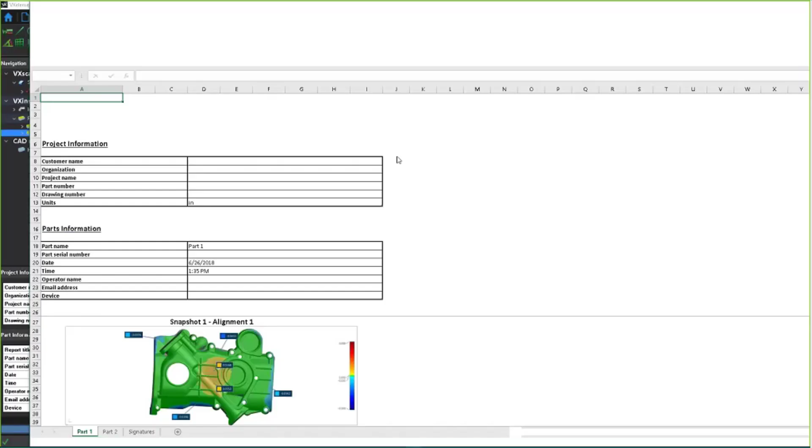Give it a second to pop open Excel here. So now when we export out our reports, we will see that we will have 2 reports in our Excel spreadsheet. Right down here on the tab, I have Part 1 and I have Part 2, and as many parts as I have, I'll have down here on the tab.

And the benefit of doing this is now I can grab the deviation or measured value of Part 1 and Part 2 in Excel, and I can write a macro to get my CP, CPK values, or maybe run a gauge R&R on my process to see if it is a reliable manufacturing process.

And that's how we use a 3D scanner to improve inspection and quality control applications, and how we make inspection a little bit easier. So at this point, we are actually at the end of our WebEx.

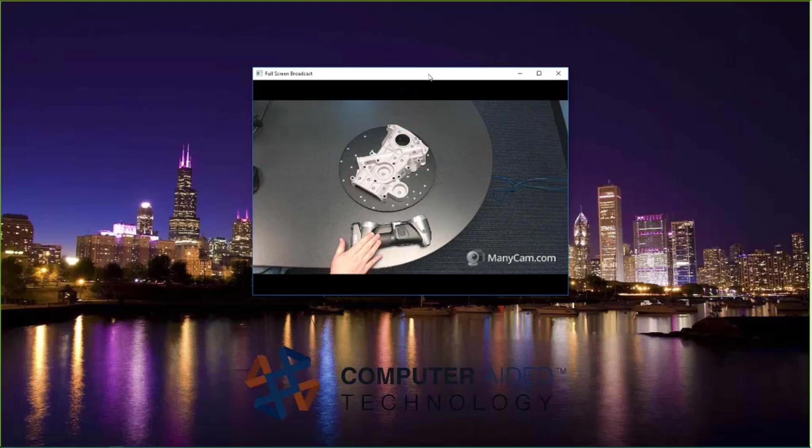There are other scanners out there, the MetraScan, which is a 2-part system, and the Handy Probe, which is a wireless probing system as well. This one comes as a 7-laser scanner, the 700 model HandyScan, and there's also a 300 model, a 3-laser scanner, but it's less accurate. It still works for metrology applications. Again, you have to ask yourself, what accuracies am I trying to meet?

Good question, what else do we got? Any recommendations on a workflow for a quick one-off part inspection? Well it really depends. You just saw it live on WebEx. For a one-off workflow, our entire time on WebEx was about an hour, and in that amount of time you could do a one-off really quickly. You could take the workflow I just demonstrated, or go a little different and just enter numerical values.

So you're talking about a 5-minute inspection, Brian. That really depends on how many critical features you need in 5 minutes. You saw when I automated the process, quickly re-verifying all those critical dimensions was less than 5 minutes. If you just needed to grab 1 or 2 measurements, you don't have to do that in the inspection software. You can scan up the parts and manually pull those measurements, just say give me the measurement from here to there, point to point, or plane to surface.